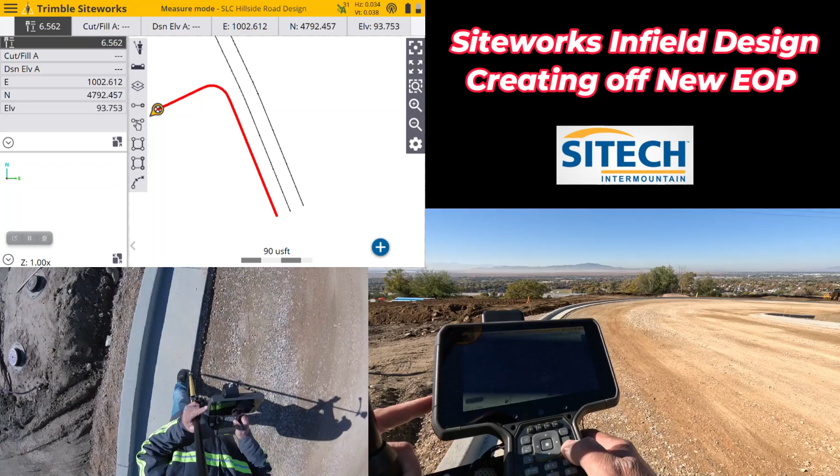In this video I want to do an infield design on a job site that we're going to grade out and get ready for asphalt, but there is no design. I want to show this for two reasons: one if you didn't have your own design, and one if you had your own design but the concrete guys poured it and missed the elevation so your model doesn't match. I want to show you how to use just your Siteworks to make the new model without having to throw it in CAD, and get back and running really fast.

We're up here above Salt Lake City. There's the Great Salt Lake out there, or what's left of it. We are going to take this road where they've already placed most of the road base, and we're going to as-built the edge of this road to create our own model on both sides. We do know from the set of plans that we've got a 2% crown in the middle here.

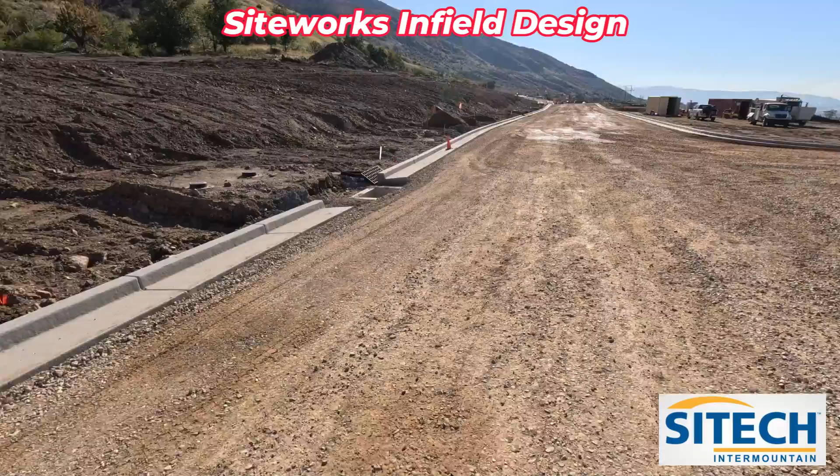Now, I intentionally picked this intersection to show you that the actual drain boxes haven't been completely formed in, but there's enough curb at all those junctions to be able to build through. But this one section right here does not have the radius around here.

Intersections are already challenging enough when you don't have Trimble Business Center or any sort of CAD program, but we're going to as-built that side of the road all the way up over, and this side of the road, and build the crown. Then I'm going to show you how to still use the stakes that are here to actually build in theory what the concrete should be.

I understand in this scenario they may still pour the concrete and be off, but at least if your crews need to get going, I'm going to show you how to use your offset option and vertical offset option to shoot in that curb line right there.

The other thing to keep in mind here is this was all slip formed in with a machine. It's all pretty straightforward, they didn't have to hand form it. Everybody does it a little bit different.

So what I've learned is do not shoot every seam. If you shoot every seam or half a seam, you're creating a point that's going to triangulate straight across, and it's going to possibly make it chattery and jumpy for the grader hand or dozer or whatever you're using. So if you've got a pretty straight grade here that doesn't have a lot of highs and lows, I would go every other joint, just in my experience. You can do it however you want, but take enough to where you're getting the grade.

Same with this side, even though the road's going up, that's not the issue. You just need to make sure that if you're doing a road that has a drain box or a high point, that you do get a shot on the high and low point. There's not a lot of ups and downs, and it's pretty consistent, so I'd go every other joint.

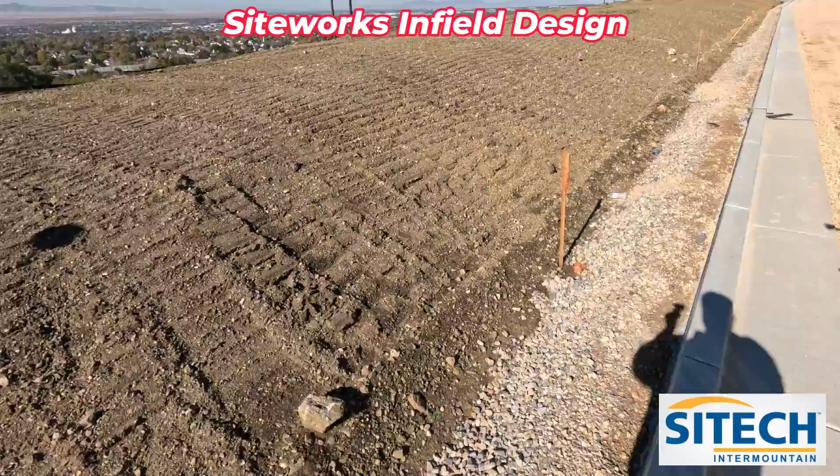What I've got here is our base set up. I do not have a calibration for out here, so on this job site I'm just going to go ahead and shoot my base pull in, and create a 1-point calibration right here to get started. As long as I put that back in the same spot every day, it's going to be relative.

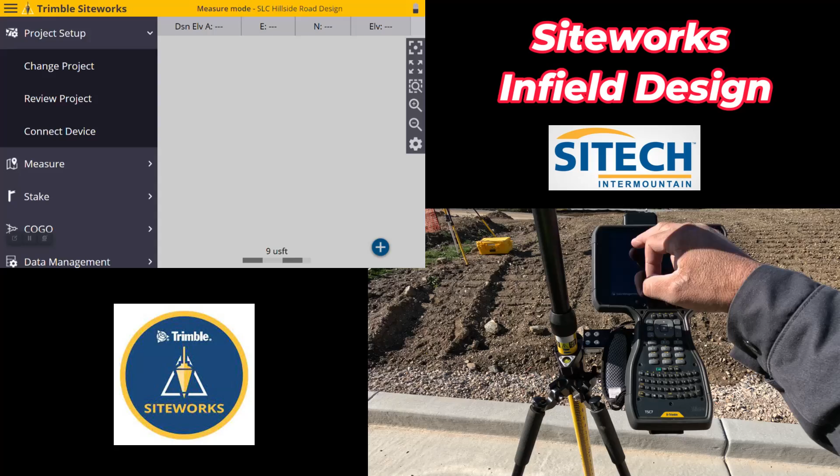Okay, so what we're going to do here is I've already got my base running, I've got the job site set up. I went ahead and created a dummied-in job site that's a Salt Lake City hillside road design, and I've got a work order that's edge of pavement, EOP as-built, no design.

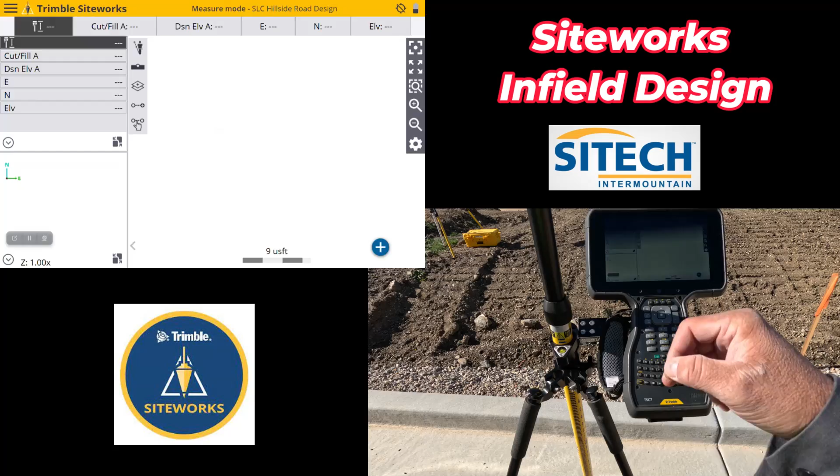Let's go ahead and hook up to our GPS. I'm going to go GNSS, Rover, Bluetooth. I'm going to scan for my device since I've got quite a few in that list. Okay, 1438. Radio and receiver, 19 is what I'm running on.

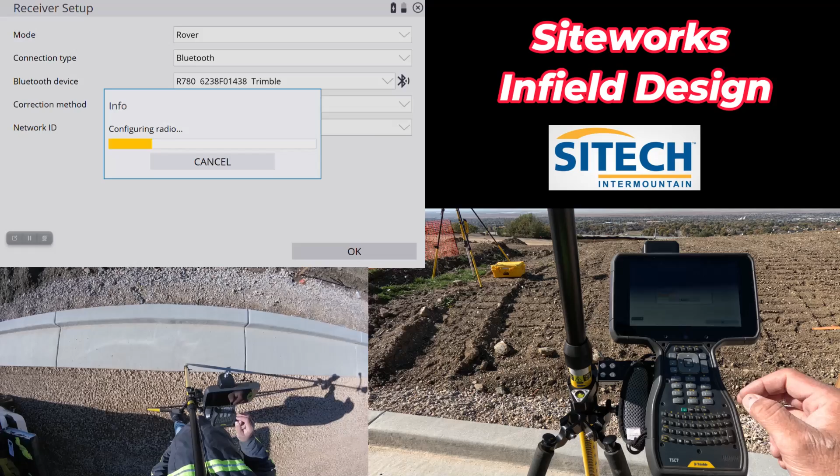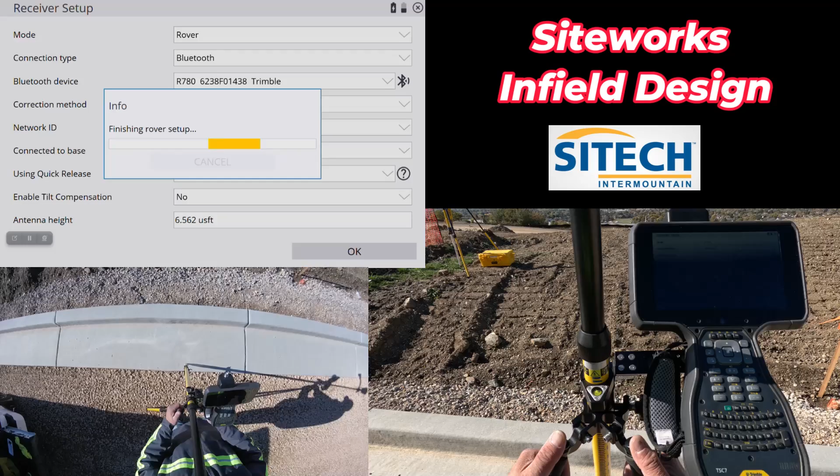It is base point, and I am going to use my quick release, and I am going to use tilt compensator, but I'm going to leave it off since I still have to do a 1-point cal. I do want to calibrate. I'm leveled up. I'm going to change my default numbers to 5,000, 1,000, and 100.

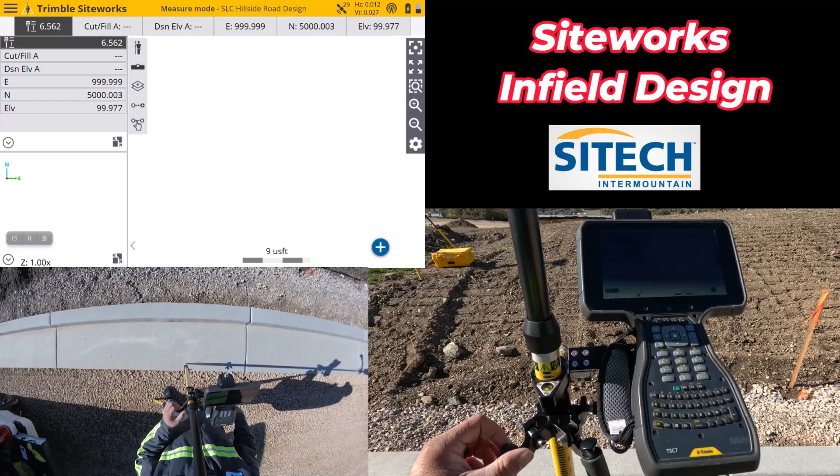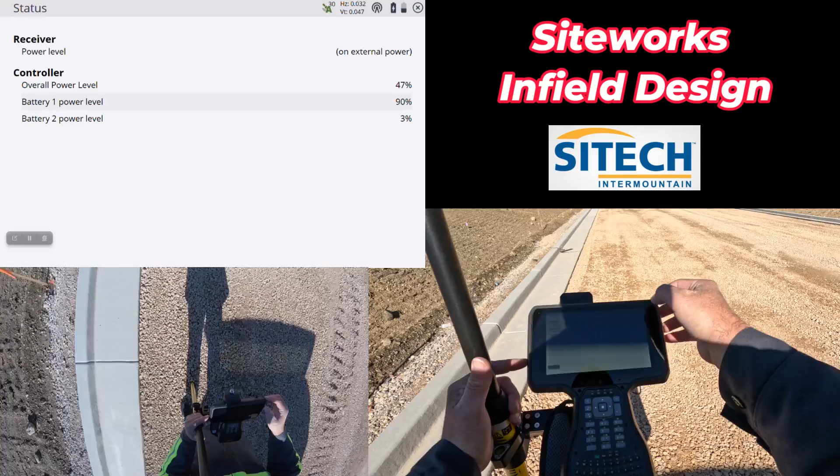What I'm going to do is turn on my tilt compensator real quick though. Turn that on, hit accept. Once that IMU sensor is on, we're good to go. Let me check my batteries.

One thing to note here is as we go into this intersection down here, I want to offset over from this side, to my crown line, not knowing exactly how wide the road is and what the higher side is. I'm actually going to shoot a line string from side to side because I want to know what side is the higher side, just so I make sure that I offset from the correct side.

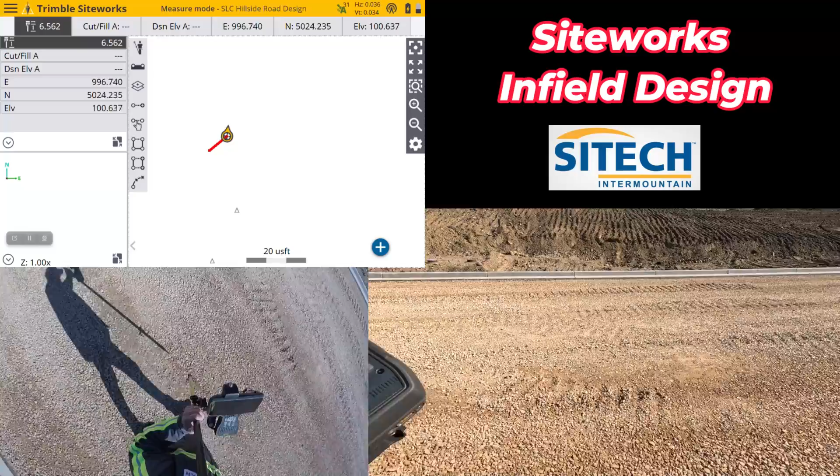Okay, so I'm going to shoot a line string really quick from one side to the other, just to verify exactly how wide the road is and what the higher side is, just to make sure that I'm shooting my offset line as I make this curb to my crown from the correct side, so I get the elevation right. You don't want to offset from both sides.

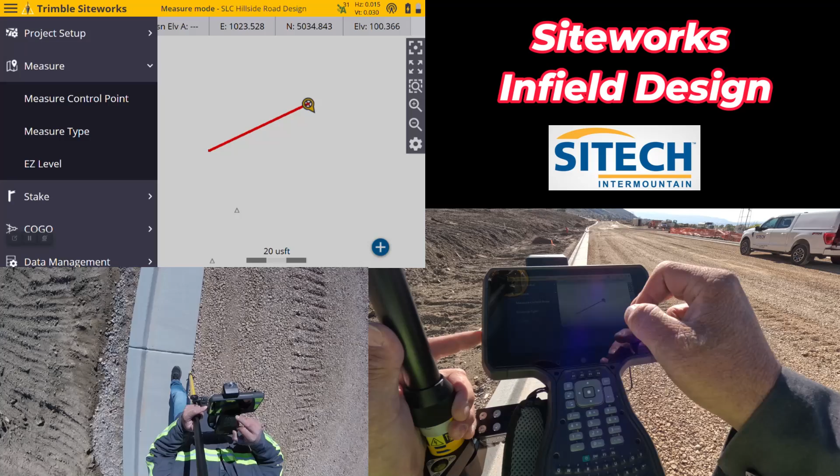So once I've shot a line string, I'm going to hit measure. Then I'm going to check and see how wide that is. So line information, it's 35.9, basically 36. So we're going to go 18 feet to the crown in the middle.

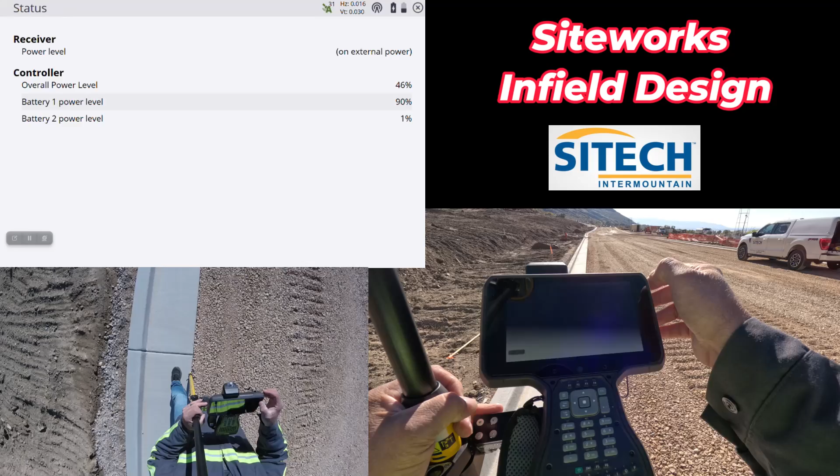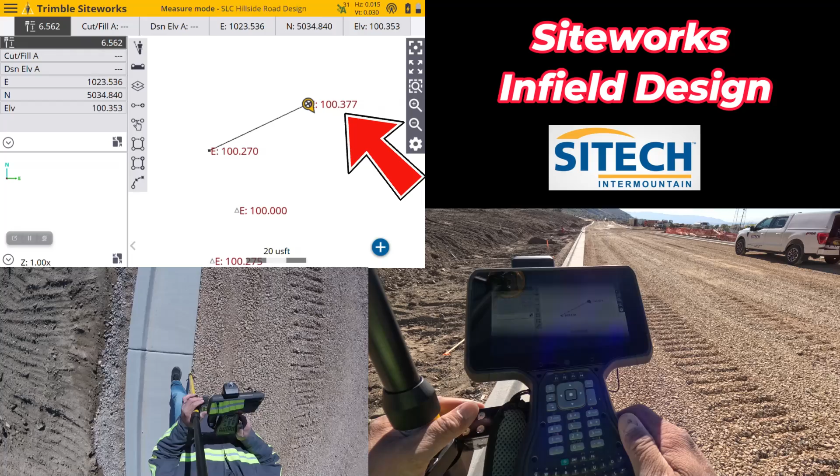What I also want to know is what the elevations are. So I'm going to turn on point elevation right here, just to make sure it's not way off. So we've got a 37 on my side and a 27 on that side, which is good.

Because I'm going to offset this from this side to that center line, and that's what I want to do. On the other side, I'll just create a break line to surface it out. So now that I'm good there, I'm going to delete this line out and get rid of it and its points.

So just for the sake of this video not being super long, I'm not going to shoot all of this in. I'm just going to do this section to show you how you would do it, and you could carry on at that point. From here, I'm going to build the model from here back to about that connex.

To get started with advanced measurements, if you don't have advanced measurements, it's not the end of the world. You can create a break line and then offset it in COGO. But I have advanced measurements, so I'm going to go to new line, and I'm going to call this EOP new, just to make sure.

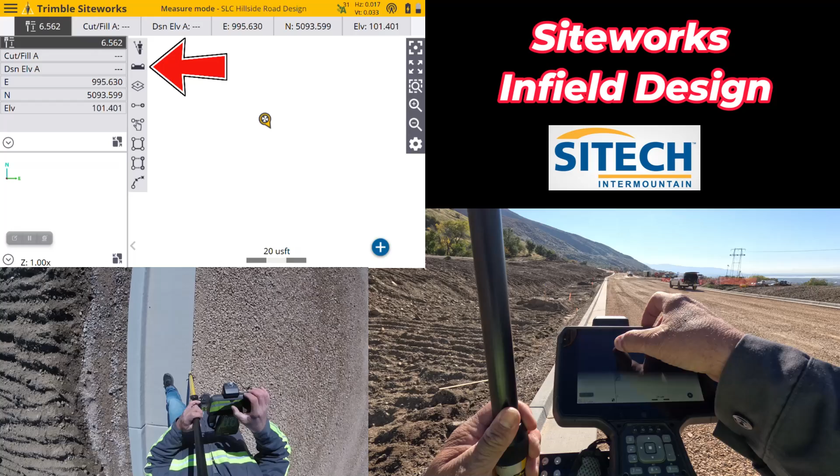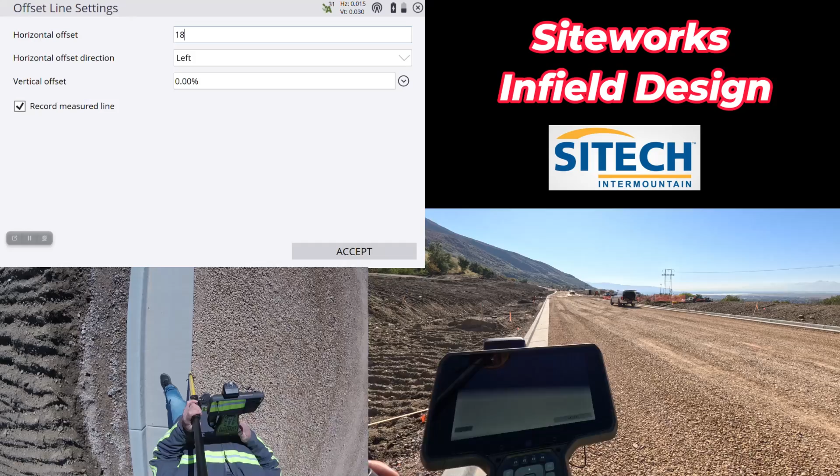I'm going to leave it as a break line because I am going to surface this out with my data collector. I'm going to hit accept, and on the screen here I've got this icon with two dotted lines and a solid line from one side. That's my horizontal offset, where I say okay, I want to make a new line as I shoot this one to the center of the actual road here, and I'm going to say to my left.

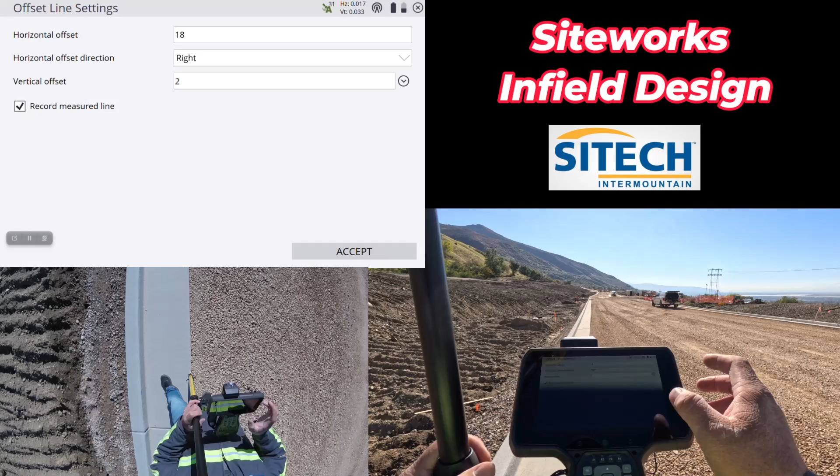Because that's the way that I'm walking, and I want to make sure this is 2% up. I have options over here for different settings, but I'm going to put it on slope, so it's on percent, 2% to the crown, and I'm going to hit accept. So all I have to do now is basically shoot a point, and I'll turn the elevations back off so we don't see that the whole time.

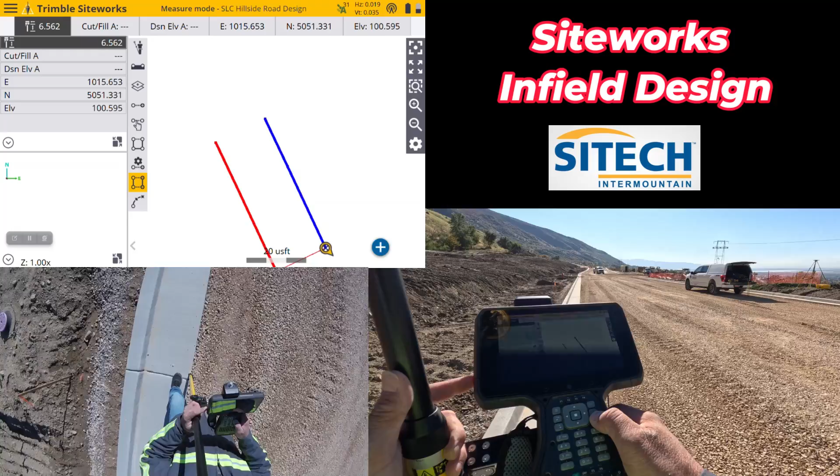And as I start walking, you'll see a line to my right side, basically creating that center line for me. So we're just going to walk down through here. Remember what I said about these shots: you can go every other joint or a little bit further if you need to. You need to make sure that you get a good representation of the elevation, or there's no reason for what you're doing. But don't get too many, or you're going to create problems for yourself.

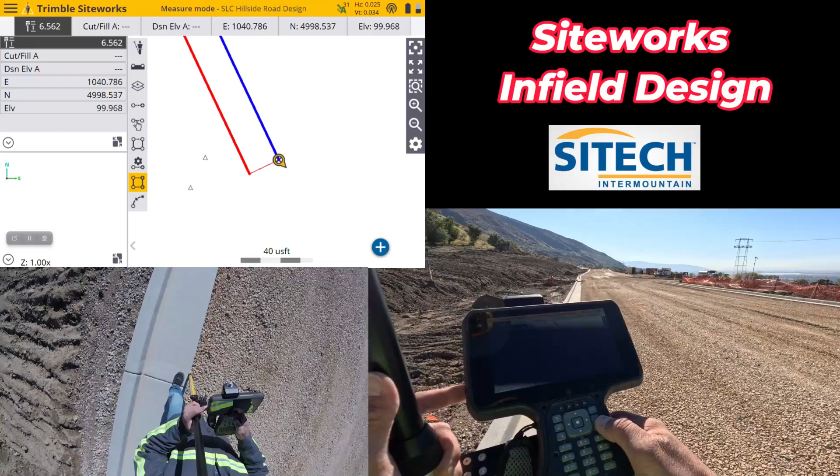I've experienced it myself where I've taken so many shots, and if they aren't relatively straight across from each other, the way the data collector surfaces it out creates a chattery model.

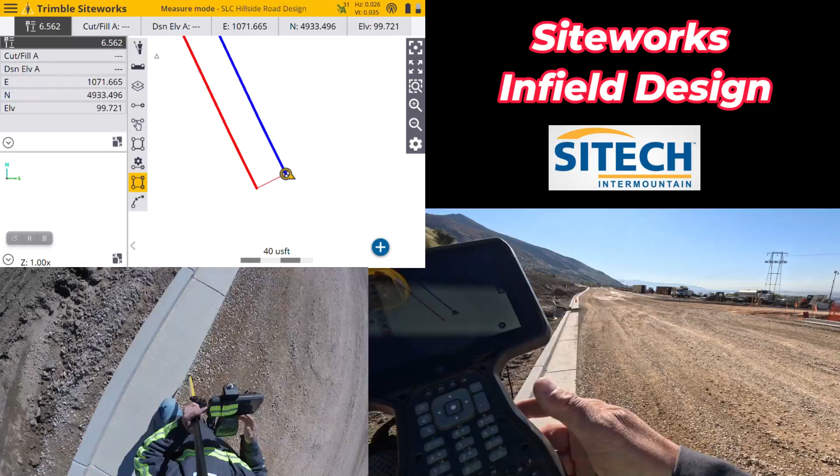So at this intersection here, I'm going to continue to project my crown line through here because they still have to have that 2% from center line to get the water from there to come down. On the other side, when we do those radiuses, I'm not going to project to the middle, at least on the radius part, and I'll show you how to put that together after.

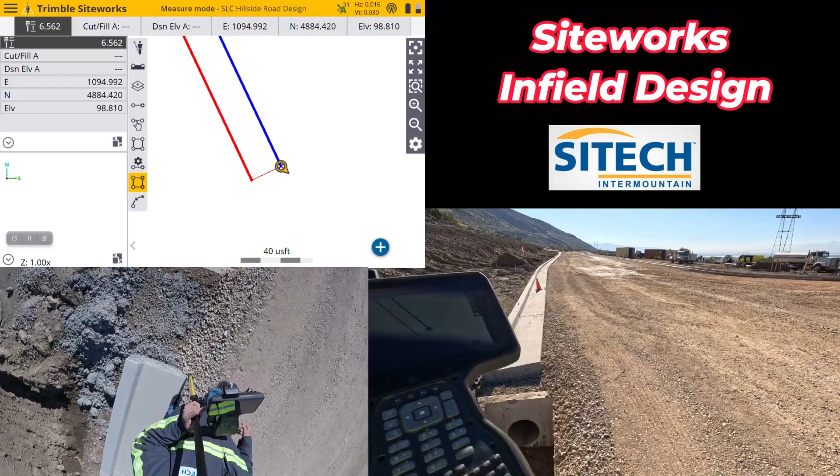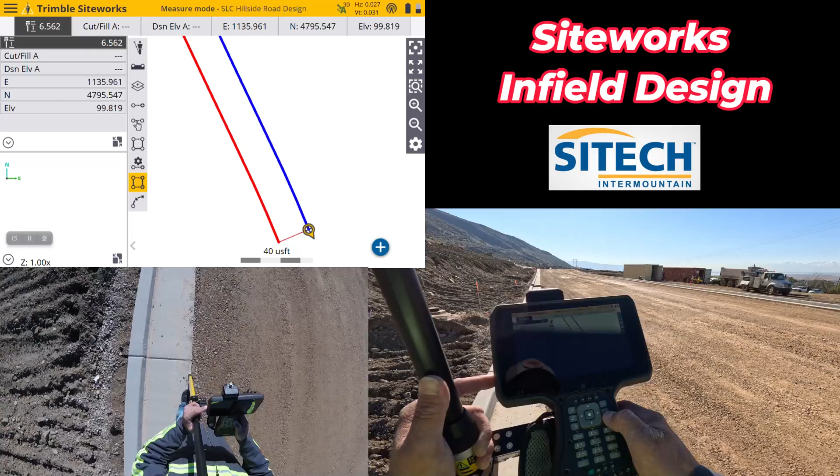On these bends, where it bends a little bit, this is a situation where you might want to take just a little bit extra. On a vertical bend, a horizontal bend, whatever it is, you're thinking outside the box to do this, but you got to make sure that you're still practical.

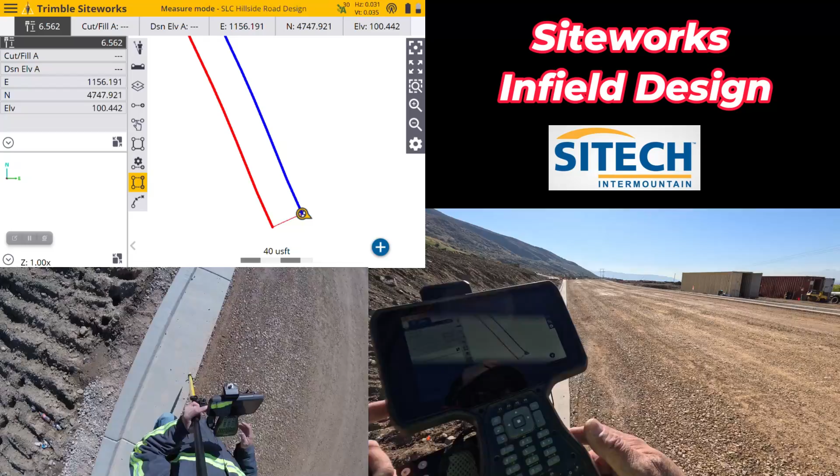Basically, think in digital string lines. Think of everything you're doing as if you were standing here holding the string and another guy was holding the string on the other side, and you were checking grade that way. Your rover is going to make those digital string lines.

So I'm just going to jump over from edge to edge of this box. Now, for the sake of this video not being too long, I'm not going to do this entire road, it goes a long ways down that way. So what I'm going to do is end right here. I'm going to end that line and just start a new one.

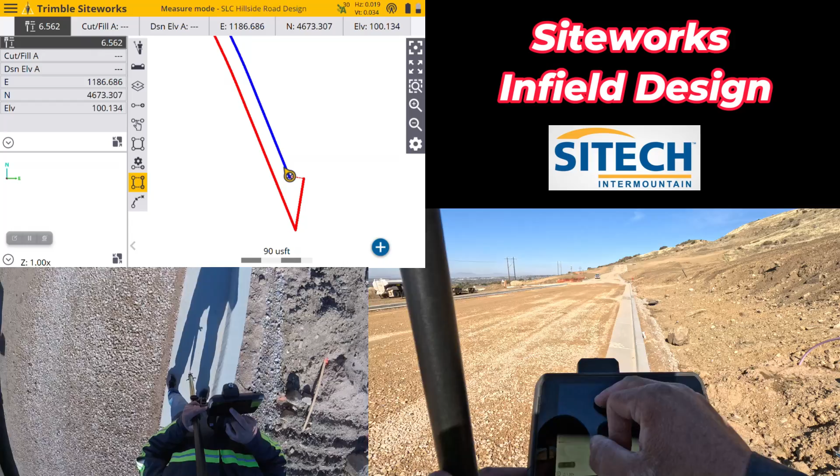I'm going to go back into the roller stuck in the mud, and I'm going to make a new edge of pavement. So this is going to be EOP 2, but I'm not going to project to the middle with my offset line settings because I'm only going to have the one in the middle, or they're never going to match elevation-wise. So at this point, just make sure it's a break line.

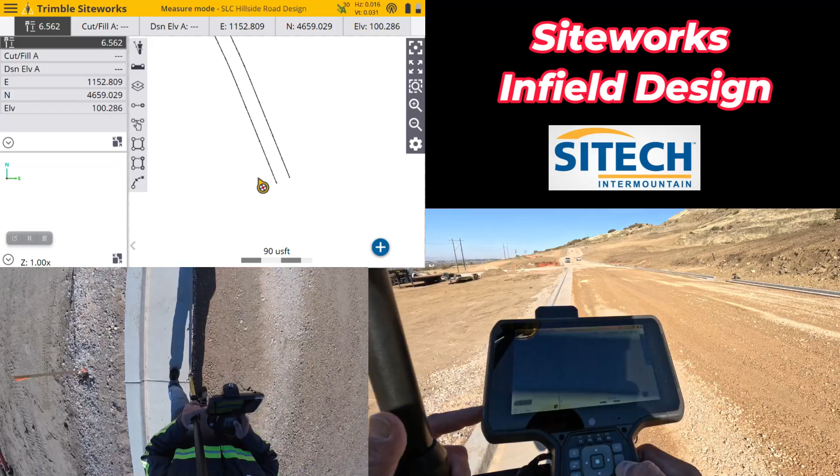Do the same thing, and we'll shoot down, and I'll show you when you get to the radius, stop and make sure that you're not projecting anything in the middle. Work your way around it.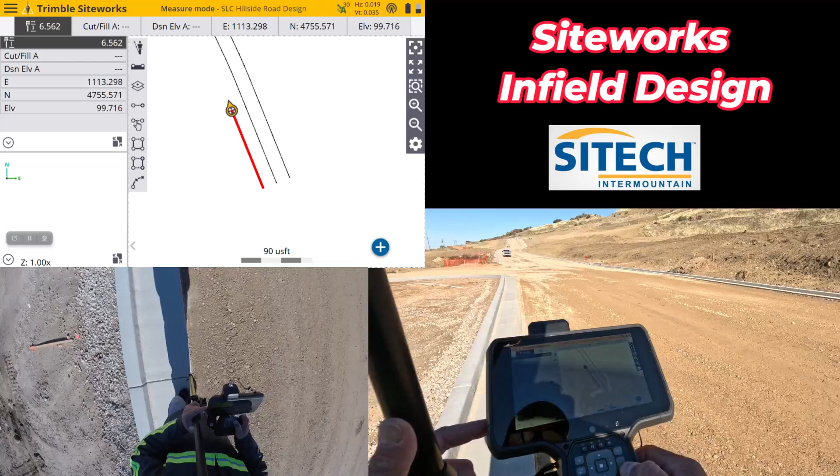Now, as soon as you get to the radius, you do want to start taking more. Don't take one every like 4 inches, but at that point I just usually pick up and go a couple steps. Yes, it's still going to kind of make a little bit of a jog, boom, boom, boom, but you're still at least gathering the information and the elevation that's here. So I just usually go a couple steps, take a shot, couple steps, take a shot. Once you straighten out, if there's no other bends horizontally or vertically, you can go a little bit further.

Now, same thing, as soon as I get to this bend right here, it's not as sharp as the other one, so I'm going to take maybe 4 steps. There's no real right or wrong here, just something that you'll learn what makes it good and what doesn't in the long run.

So now that I started up another one, I'm going to project to the middle on this one. I'm going to do the same thing to my right, 18 feet.

So on the other side, I just carried that break line all the way around. But this side, as I go back, I am going to create my 2% crown line to the middle, as you can see with the red line. There's both a lot of horizontal turn here, and it's also coming up quite a bit quicker. So at this point I'm going to go every joint just for this last little section here. Now it's leveling out, so I'll go the last 2 before I get to the end here.

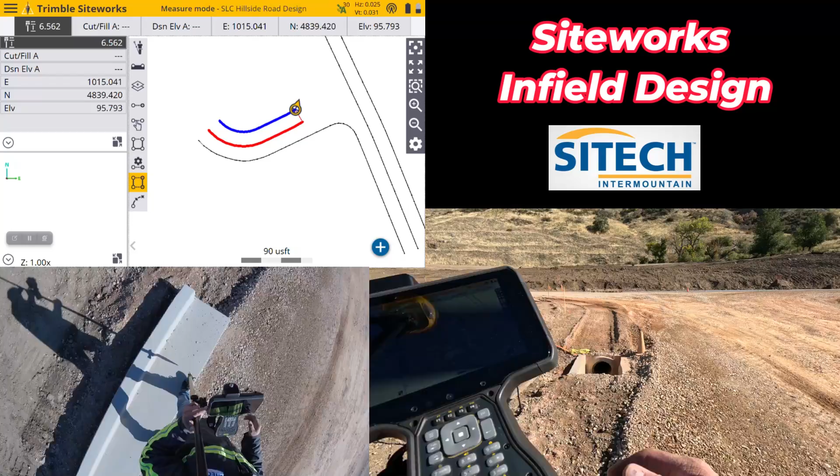And then what we'll do is I'll show you how to build this in as if the curb and gutter was going to be here. Like I said, the whole reason we're shooting what we're shooting is to make a model off of what's existing. At this point, we're just going to hope that they hit the mark. It seems like they have with a lot of other stuff.

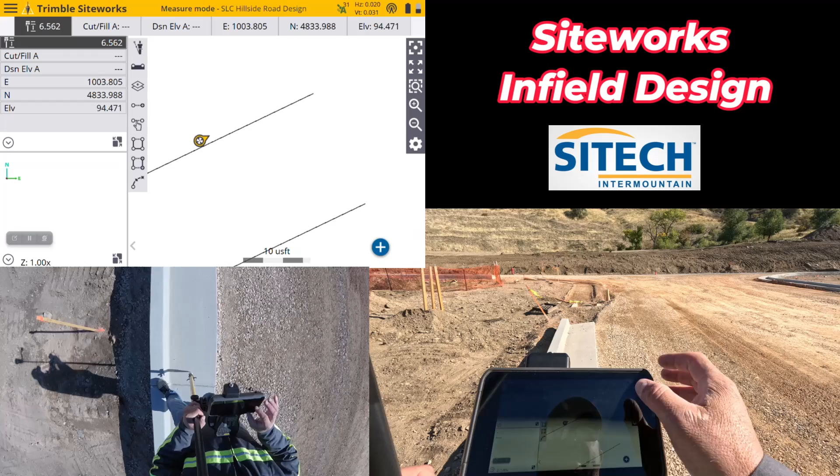So what we'll do now is we're going to end. I'm going to hit the menu and measure to end that line. Over here, we don't have an actual point there, so I'm going to come back to this one. Having known that, you can see I built the line a little bit further than I needed to. I'm actually going to delete out this point right here on the very end of it. Just make sure you don't delete the line, I'm going to take out the point and delete that.

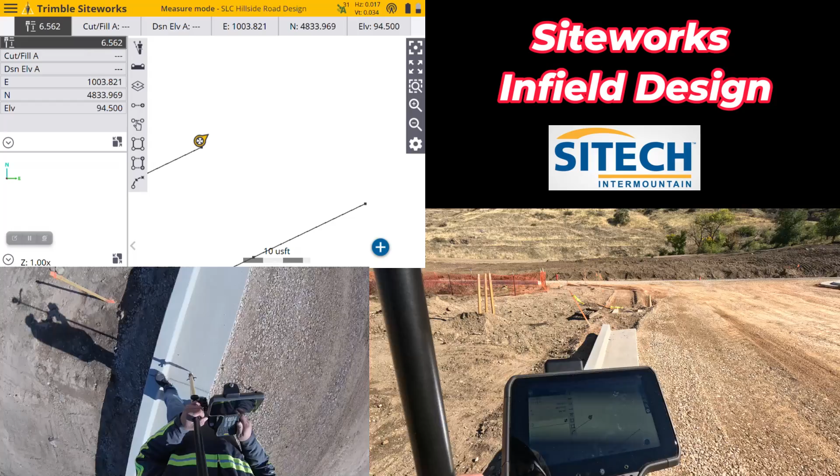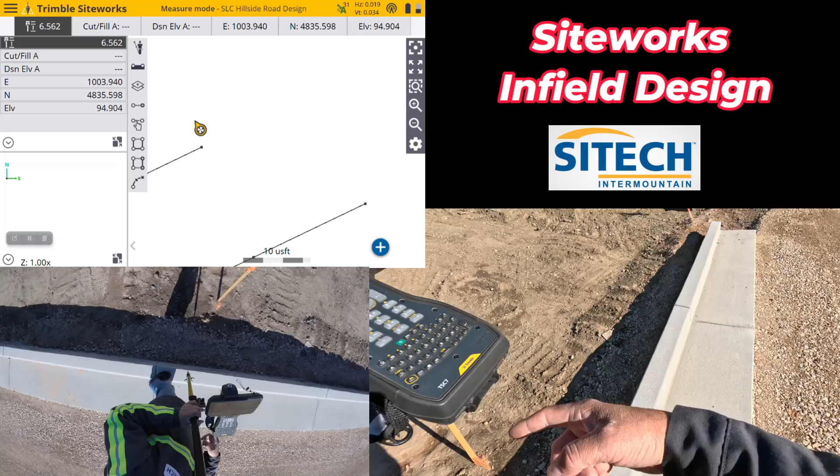What this is going to do is shorten it up. So now, looking at these stakes, that's a 3-foot offset to top back of curb, fill of 194. If I sit down and shoot on that, I can shoot it with a vertical offset option, but I can also horizontally offset it over. So I know that our curb and gutter, our lip of gutter, is about 0.35 lower than top back of curb, so I can shoot a line string right along this using those points and build my curb in at the same time.

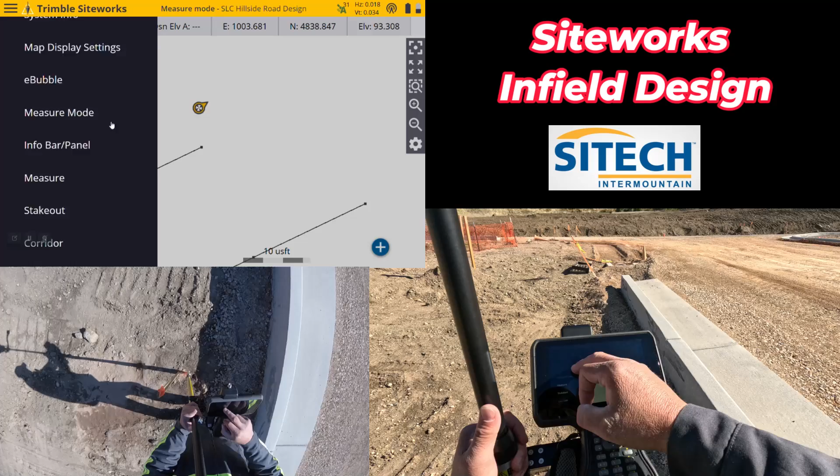So how you do that is you go into your settings and enable something that may be turned off by default. Go to your menu, down to settings, and go to measure. Right here, the second one up from the bottom says measure offset. That one is defaulted to disabled. I'm going to enable that.

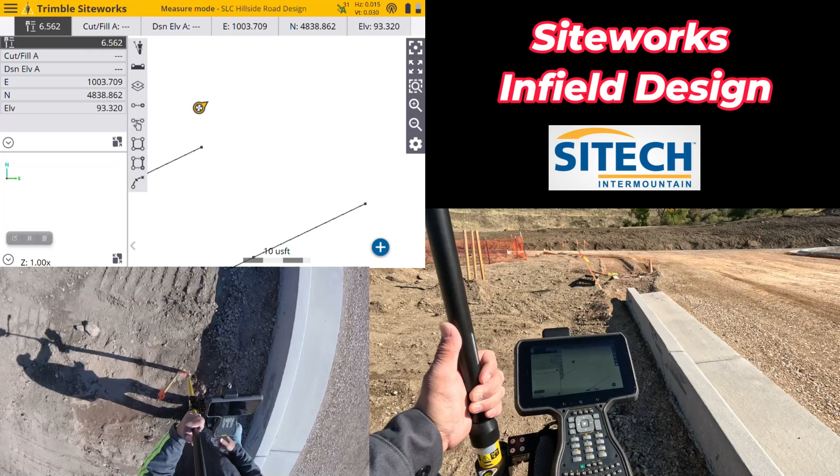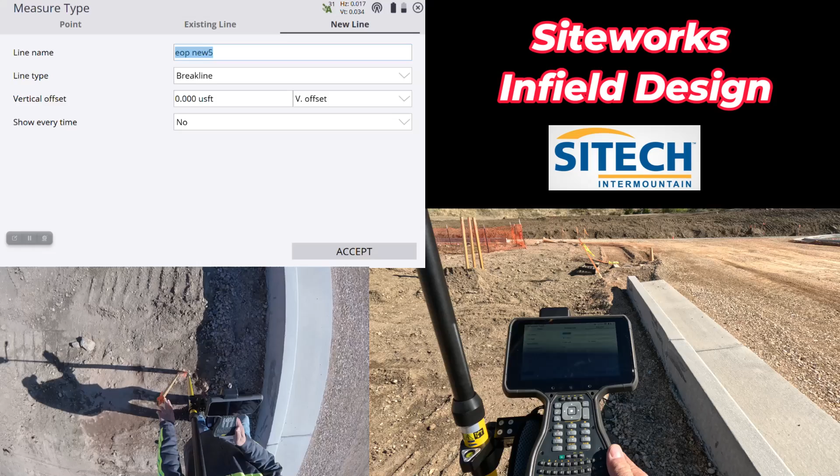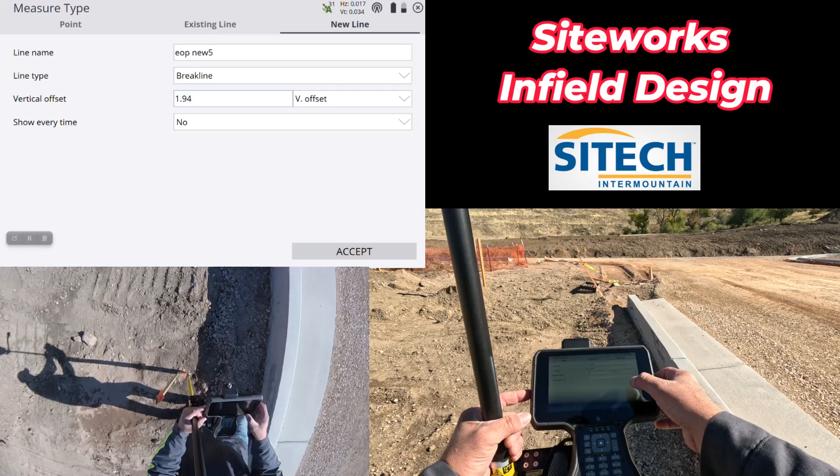The reason for that is now I'm set up here. I'm going to go to my roller stuck in the mud, which is my measure type, and do new line, and you can see I've got extra options here. I'm still going to make a break line, but my vertical offset is going to be the number you see on the screen right here. So at this point I can put in a 194, so 1.94 vertical offset, show every time, yes, because it's going to be a different number every time, and I hit that.

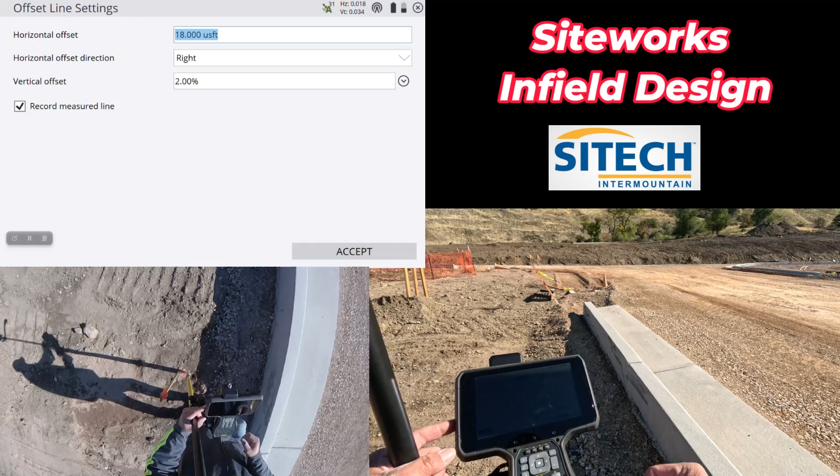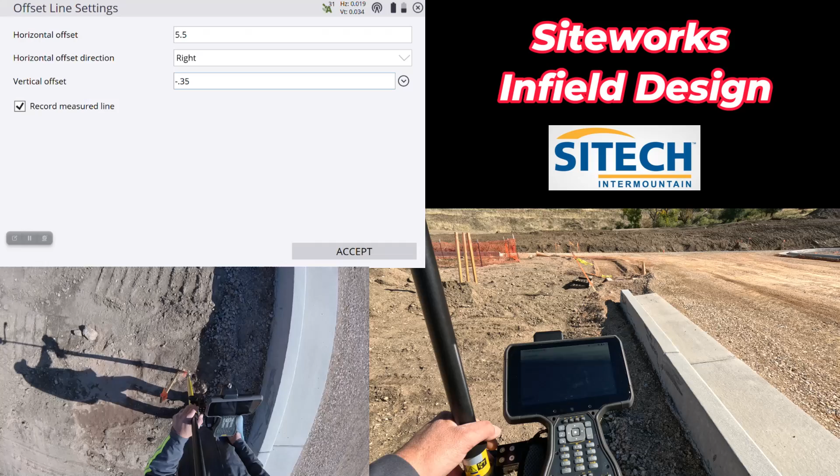Now I want to enable my offset settings. Right here I know this is 3 feet to back of curb, and then it's a 2.5-foot curb, so basically 2.5 plus 3, 5.5 is going to be my number, 5.5 to my right. But on the percentage here, I want to change that to elevation, vertical offset, and put minus 0.35. The reason for that is I'm making my line over, so my offset line settings, but I'm also changing it in the other one. So I'm going to hit accept.

Now I can go ahead and just verify that I'm good on this one, 194, and hit accept, and it'll build me that shot right there. You'll see the line being built to my right side all the way off of the existing one that's here.

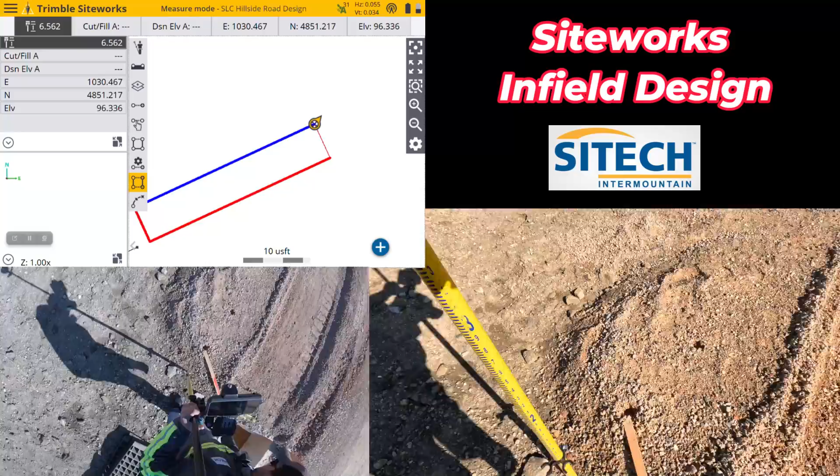So we're going to come all the way up here, to the next top back of curb, which is not that one — we're going to come all the way up here and look at this one. This one is a 3-foot to top back of curb, fill of 75.

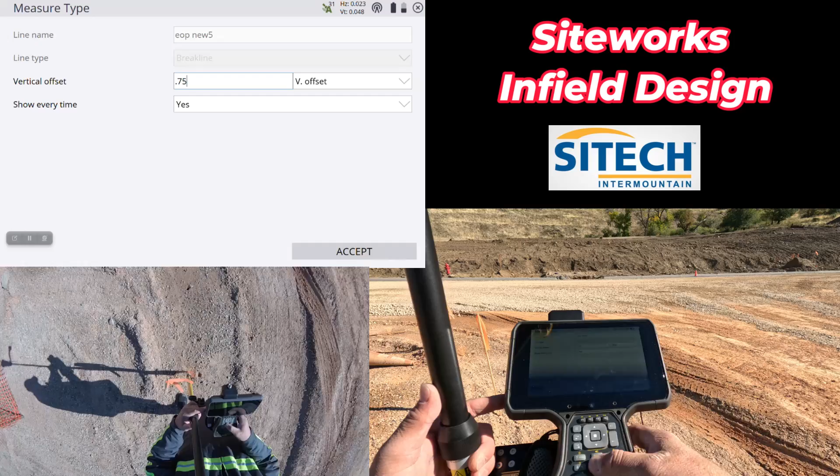Because I left that one option on that asked me each time, all I've got to do is level up, hit this, change that to 0.75, and hit accept, and I've got it.

So now I know this is going to be a little jaggedy, a little chattery around the corner, but we're doing the best we can. This one is a fill of 92 to top back of curb, so I level up, 0.92, hit accept, and it'll be a little chattery, look like a stop sign, but at least we're establishing a grade out there.

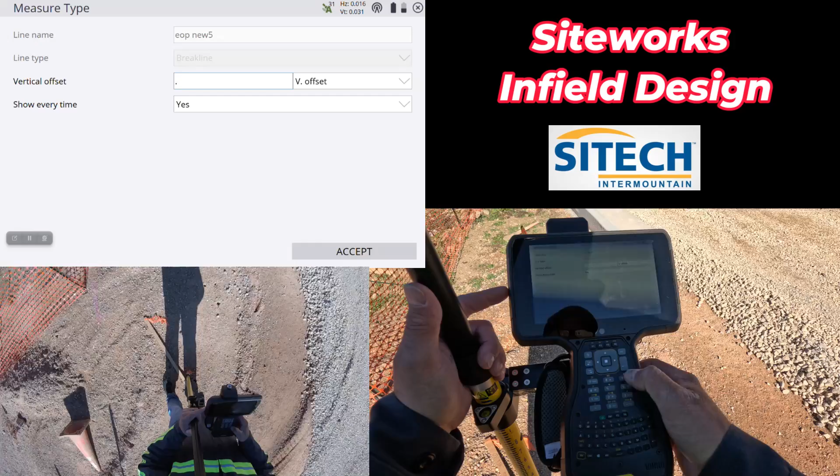This one is a 0.96 fill to top back of curb, so we'll go 0.96 and hit accept. Same thing here, set up on all these hubs. This one laying on the ground is a 0.95, so 0.95, boom. And one more here — we're going to set up here, and this one is a fill of 121.

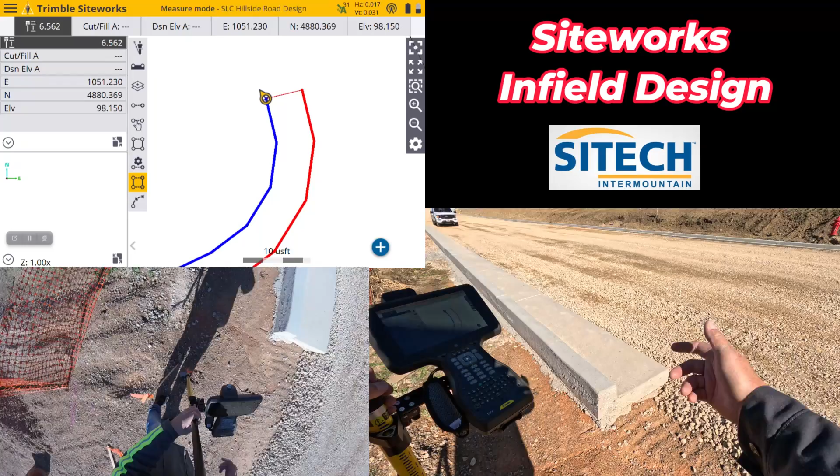So there's a little bit of a gap right here, as you can see, between this last stake and there. It's not a big deal if my last line point ends there and my next one picks up right there — it's okay because it'll just surface together.

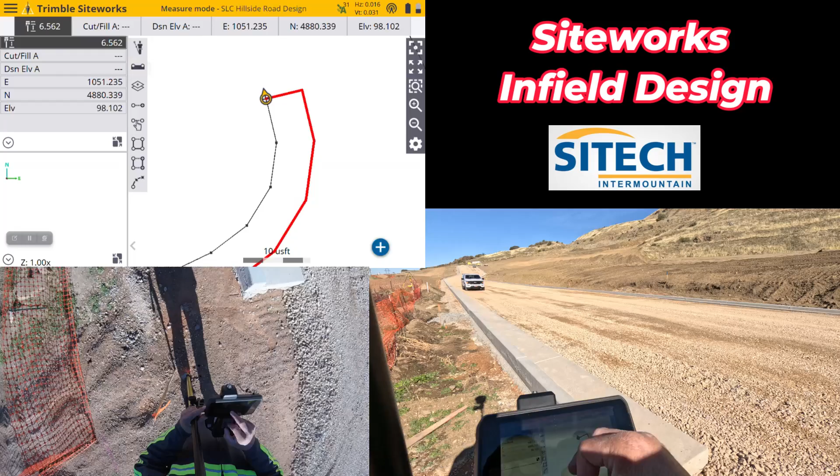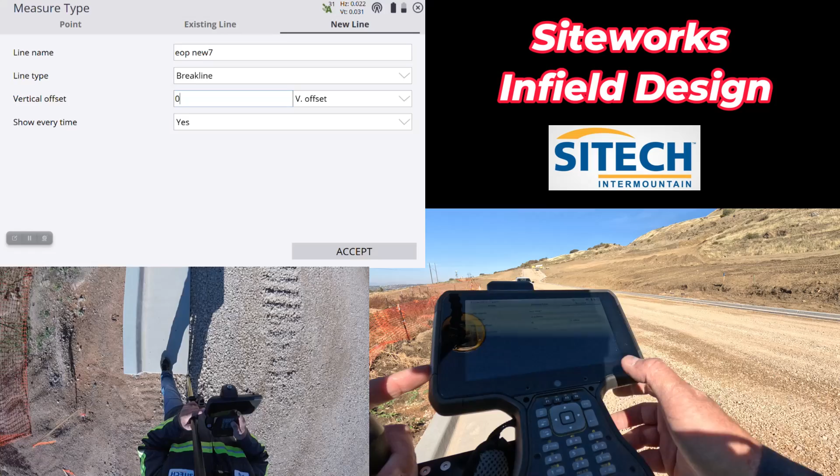And now we just pick back up. And yes, there is, like I said, a gap there, but it will surface in between that. So now that I've gone forward, I'm going to set back and show you just on the screen here real quick — I do have a line on the back side right there that may get pulled into the surface, which is not a big deal.

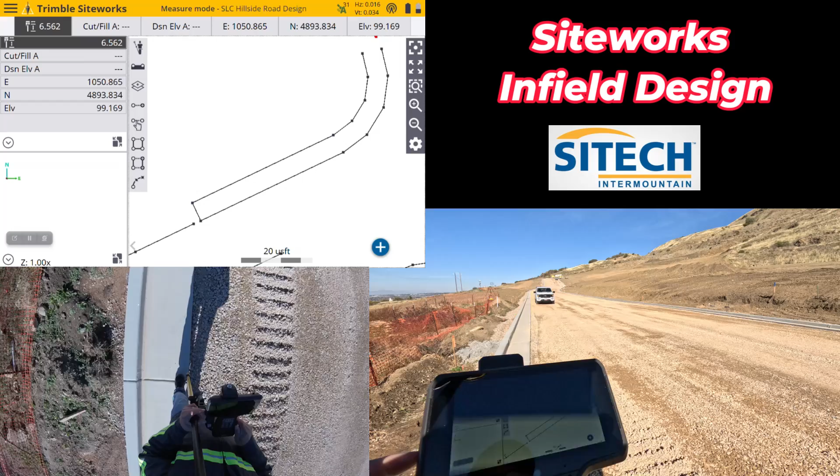You can go ahead and delete it if you're worried about it, or you can just leave it in there and it will surface it, but it's not going to mess the middle of the surface up. So we'll just go ahead and go up here just past my truck and finish out the actual as-built. Then I'll show you how you can connect that center line if you want.

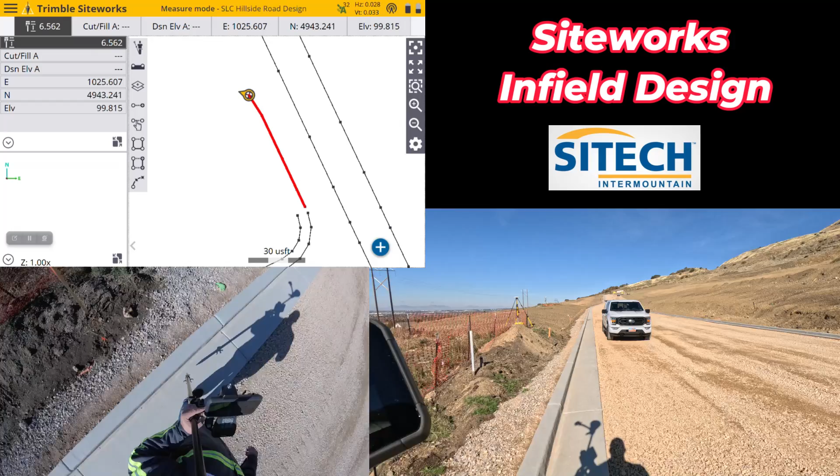Or you can just leave it and let your grader guy, dozer guy, or skid steer operator freehand it in. Some guys do not like using GPS in the intersections. My videos are not here to tell you exactly how you have to do it. They're intended to give you the right steps, get you thinking outside the box, thinking of how you would do it, since each operator is a little bit different. I'm very aware of that.

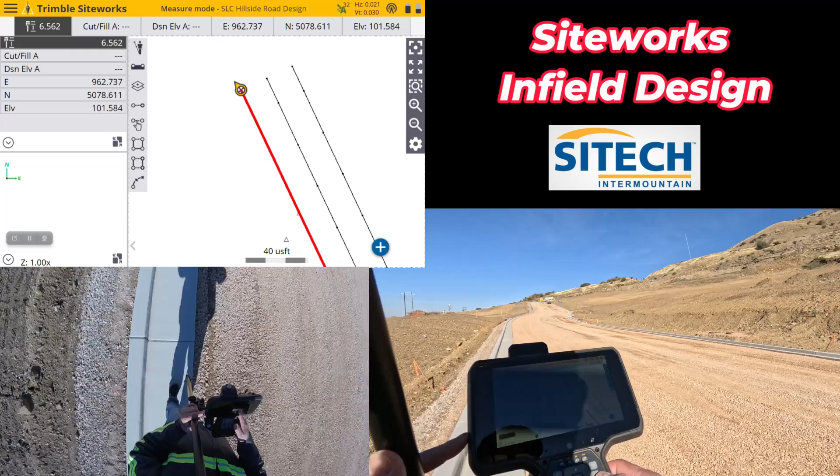So just to square it out, I'll come all the way up and just end about where we started on the other side. So to finish out a line, if you want, you can either start a new one or just hit menu and measure. So we are good to go. Zoom out, show you what I got.

If you do want to actually delete that line on the back side, I'll show you how to do that just in case you want to. If you touch and hold on it, you can delete that line, and it'll say, are you sure you want to do this? You say yes, and also the points on it, yes, you can get rid of those.

That line is gone now. You don't have to worry about it. You can get rid of this point back here so it doesn't pull that in. Make sure it's not the line that you're doing, that it's the actual point.

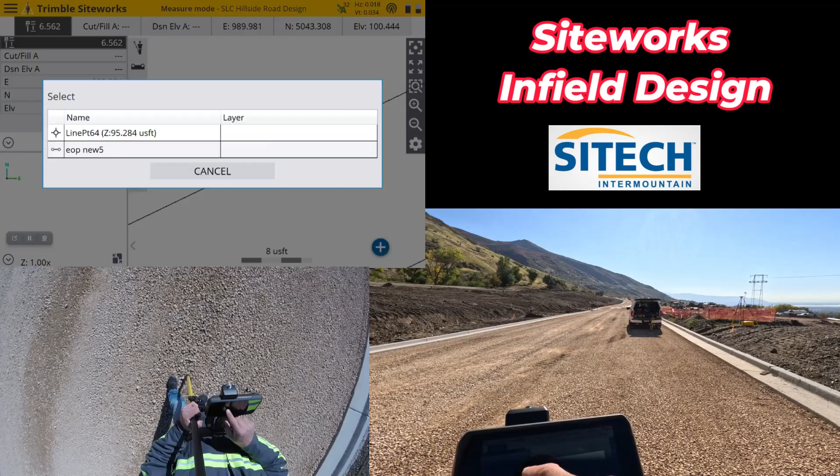There we go. So if you wanted to connect that crown line to the middle there, you can go into COGO. I'll show you a couple things. You can go into COGO and go into create points and lines and arcs to create line and boundary. So you can leave this as a break line right there. It's always got to be a break line.

And you could zoom in, tap that point. Whoops, free. You can come back off of that one and pick that point, and then you could come up here and either freehand, free click it, or if you had a point there in the middle.

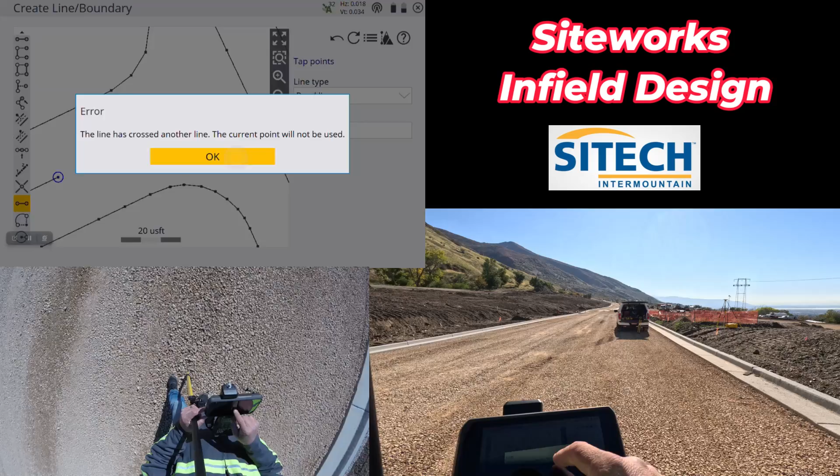What I am going to do, since I don't have a point right in the middle of that intersection, but I've got two right there, I'm going to come into the COGO, and I'm going to do create points and arcs. I'm going to come down to create line and boundary. I'm going to leave it as a break line. I'm going to zoom out and look at those two, and I'm actually going to freehand a point there and a point there to create a line.

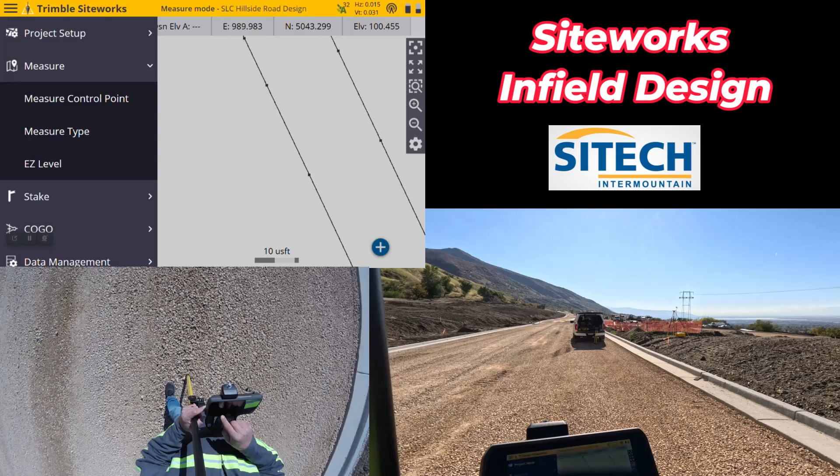Then what I'm going to do is close out of that and just view it that I've got two. So if I touch and hold on it, I've got two, it's the number 8. So go back into COGO, I'm going to review or create points and arcs, and I'm going to do midpoint of arc.

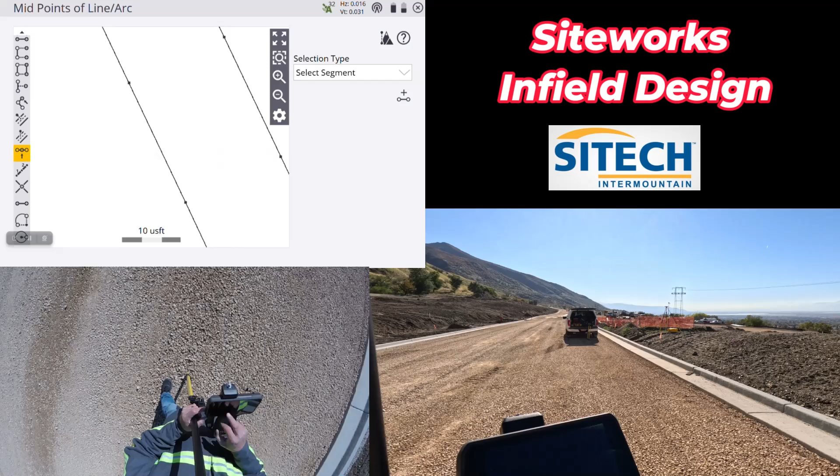So I'm going to use this midpoint of line arc, and I'm going to zoom in and tap on that one, and go to that one. So that creates me a point right in the middle. So we're going to do measured point, and I'm going to say OK.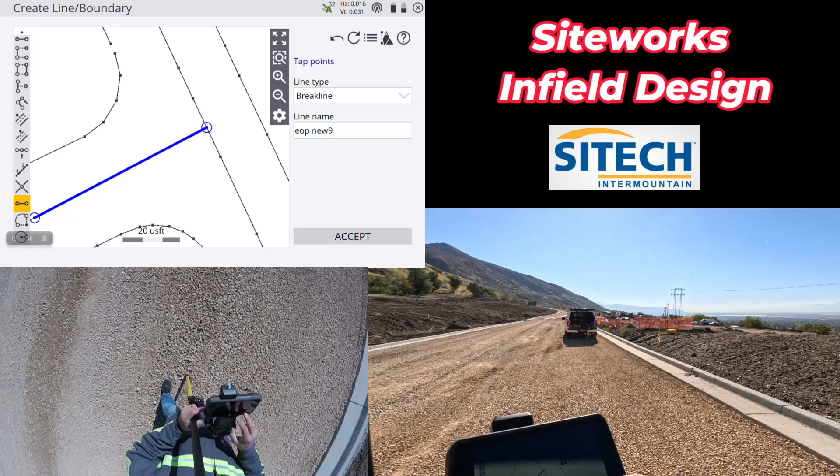Creates me a point. Then I can go back down to my create line and boundary, and I can go right off of that one, and I can go to that point, make sure it's a break line, hit accept, and I actually just right there in COGO made my own line string right down through the middle there. It might be off just a hair, so what you would have normally wanted to do is, on that other side down there, actually make an offset line from there.

But we're good to go there. Now all I need to do is surface this out and make a design, and then I can export to a machine. So in order to make a surface out of this in your data collector, all you do is go to your menu button, go down to data management, and do surface as design. I'm going to create it in my data collector first, and I'm going to call this the hillside FG for finished grade. I do want to include my line work.

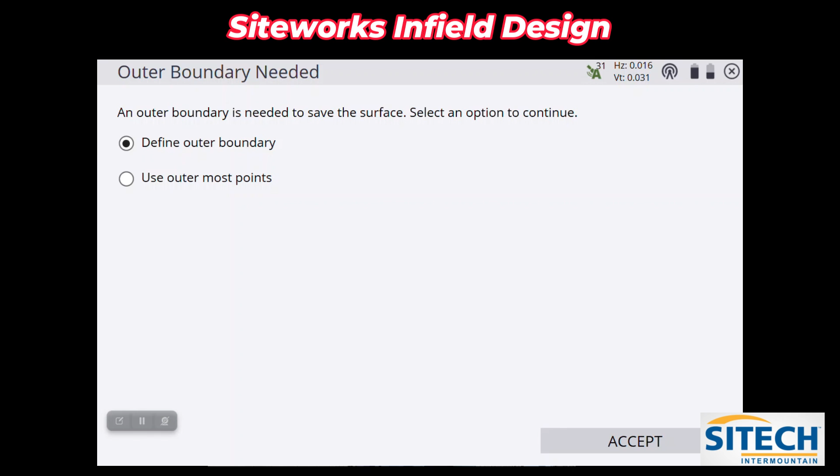Here it says, do you not want to or do you want to? I want it to use my line work that I used along the edge so I see that, so I'm going to say OK. Right here, I don't need to define an outer boundary because I created a new work order, so it's the only points on my work order. That's why I did that intentionally. Now I can use outermost points.

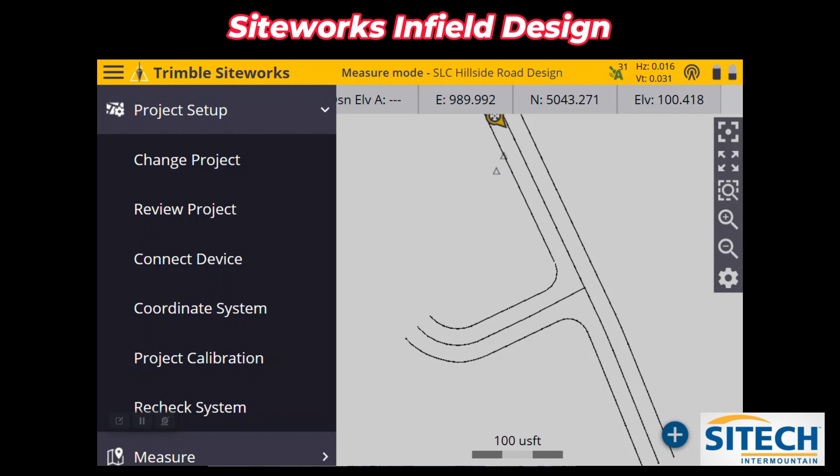I can hit accept, and it makes me a design that is now in my design menu. If I go to project setup, change project, my design folder has hillside finished grade now. So I can go ahead and hit that and hit accept and load my design and look at it.

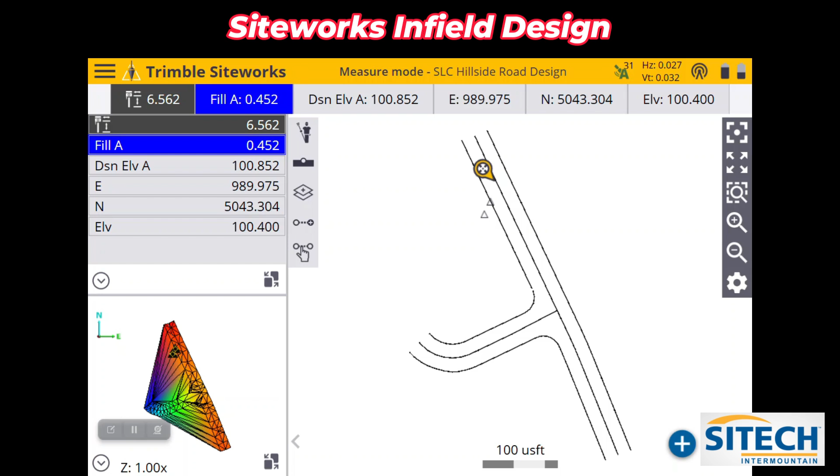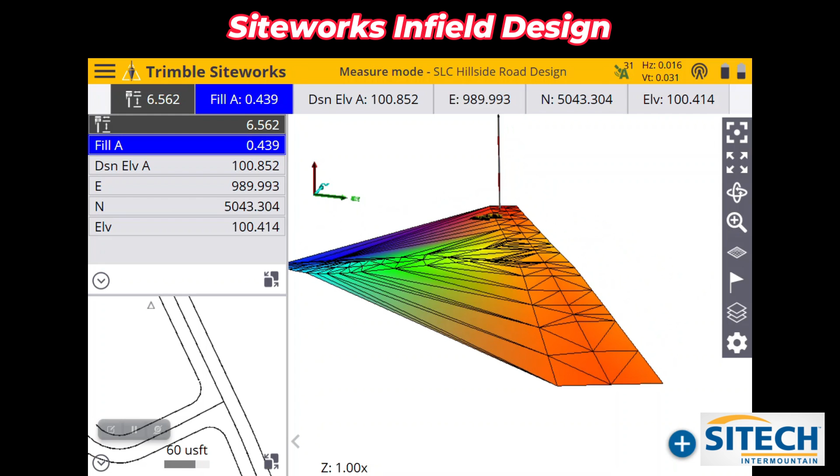I've got a design. If I move it over, it does look a little goofy because in here you can't snip the boundary, or trim the edges up like you can in a CAD program. So it kind of pulled the triangulations on the backside, but no big deal. You can go in here and pull in because inside the actual model, it is still correct inside the two curb lines. So you can start viewing it.

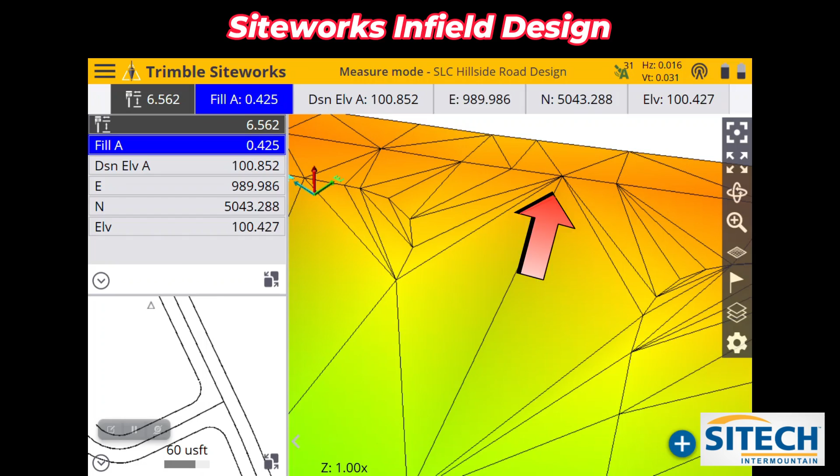You can see that I've got the edge of pavement, and a crown line. Right here, we can go ahead and just zoom in a little bit onto this intersection. You can see how it actually created really nice triangulation lines. That reason why I also put that one in the middle there is you can see that it made a really nice move from each side of curb and gutter up and didn't have any weird triangulation there. That's intentionally why I created that one. So it looks like the elevation of that curb line over there where we built it in looks pretty dang good.

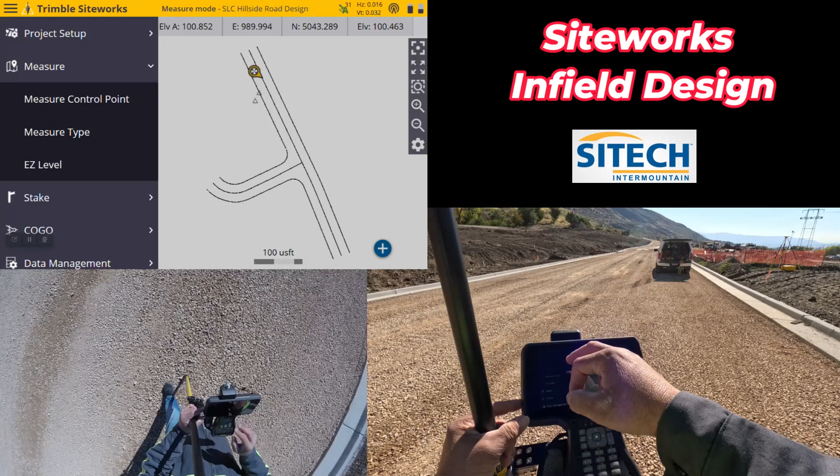Down through this road right here, looks pretty good, so you can move it back over. If you need to start checking grade, you can put in your offset. We could go down to settings and put in our stakeouts or surface settings. We can go in there and put in a 0.35 below and hit accept.

This grade hasn't been built yet perfectly. They've just kind of brought some material in and got it rough. I don't have my flat foot on, so I just picked an actual rock right there. Right now we're at about a cut of 3/100. No big deal, let's check a couple more spots right here. Set up on some rocks.

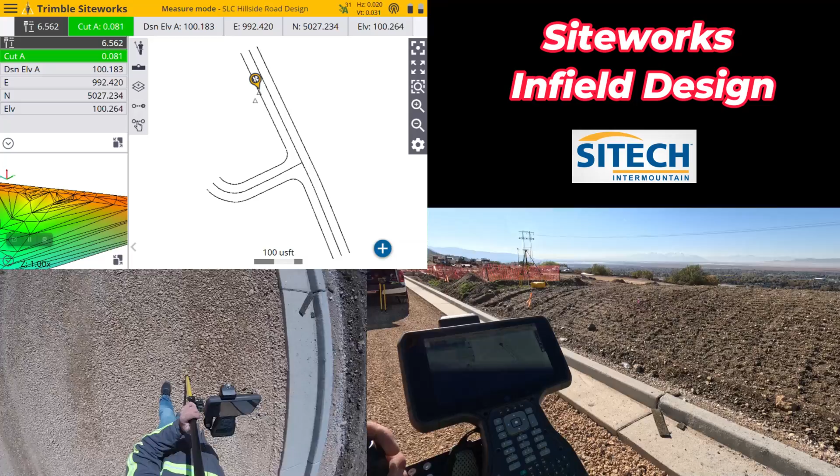Cut of 62. They intentionally left the crown a little bit low, I believe. Usually work your edges and then pull everything to the middle. Yep, they're about 3/10 low in the middle. Okay, so right off the edge of this concrete right here that we know is good, got about a cut of a 1/10. It's about right for what I'm seeing there.

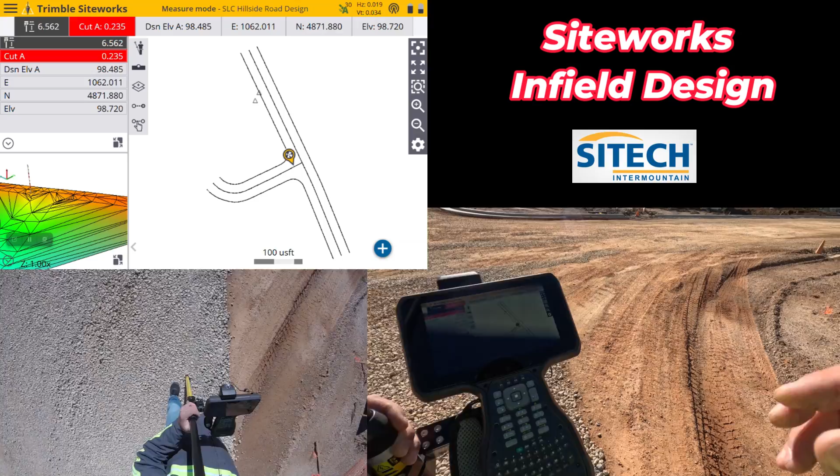They don't have all the road base in right here. We can start checking a couple. Cut a 2/10. Cut a 2 right there. Come out here to the middle. Cut of a 1/10. Yep, all this just needs to be roughed around, but at least I can go and check my own grade now, and at least let the operator know where they're at.

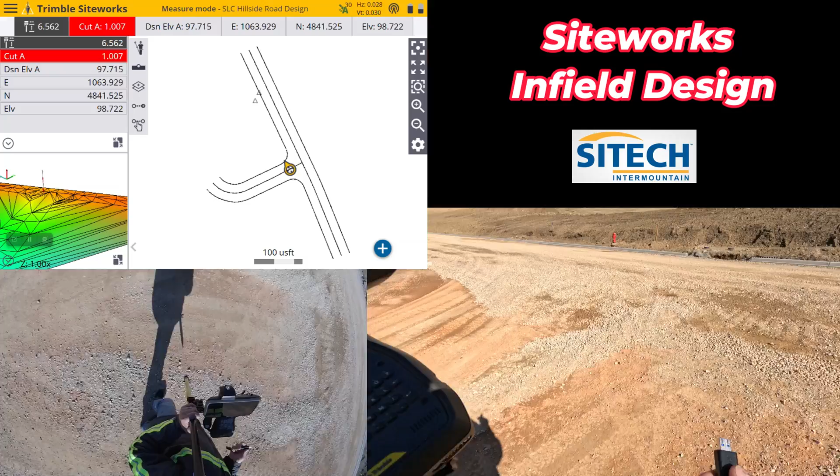Now what I can do is take my thumb drive and I can export it to the machine. So now that I have a design running, all I got to do is put my thumb drive in, and I can go ahead and go to my menu. I can go down to data management, and I can go to export to machine, and I can change this to a design because I actually have a design running, and that's what's made in this data collector.

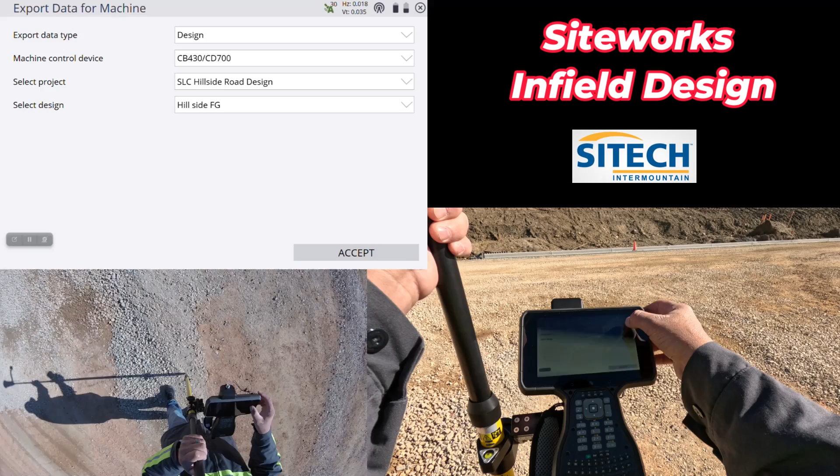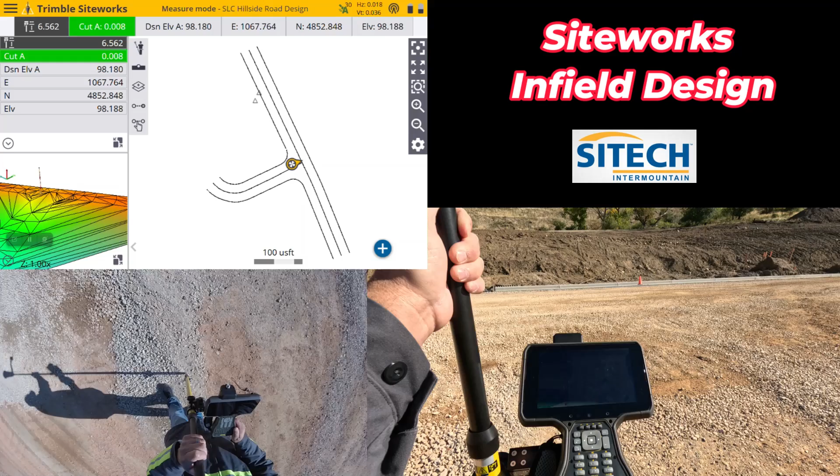And I can export to Earthworks right here. And this current design, active design, is hillside finished grade. So now what I do is just go ahead and hit accept. Data was saved successfully to the card. Once your model's built, you can go ahead and put it in the machines.